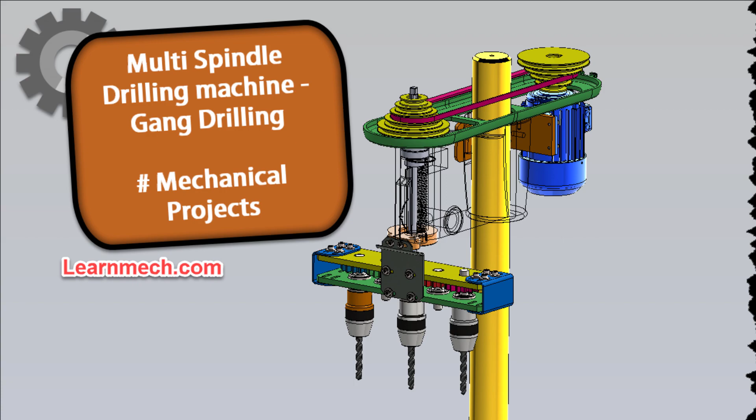In this video, we will see information about multi-spindle drilling machine, that is gang drilling machine. A multi-spindle drilling machine or gang drilling machine consists of several individual columns, drilling head and spindle mounted on a single base and utilizing a common table. Various number of spindles may be used, but 6 and 4 are common.

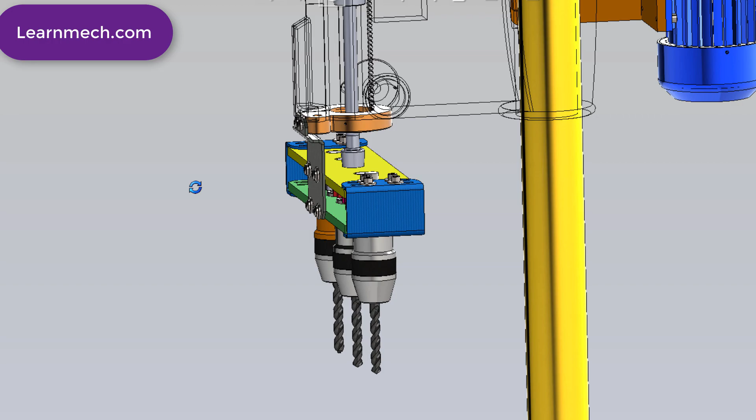For single spindle drilling machine and its parts, I have made already one video. You can check from here, or the link is given in description.

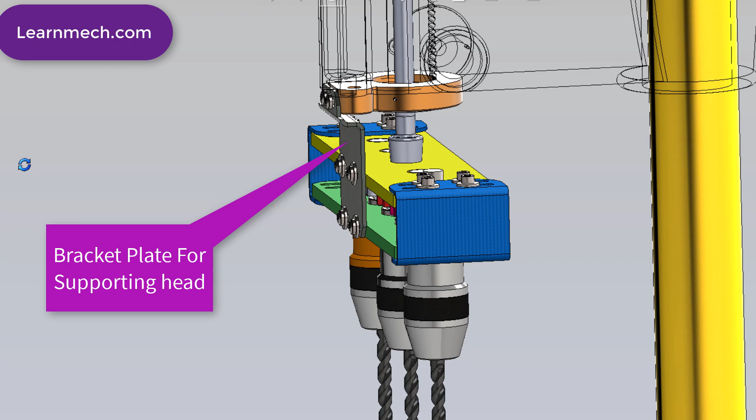This attachment is connected with main spindle using tapered collet press fit chuck. For making it more rigid, this bracket is used for extra support so that less vibration will occur.

As you can see here, this attachment consists of upper plate and lower plate made up of MS sheet and of 20 mm thickness.

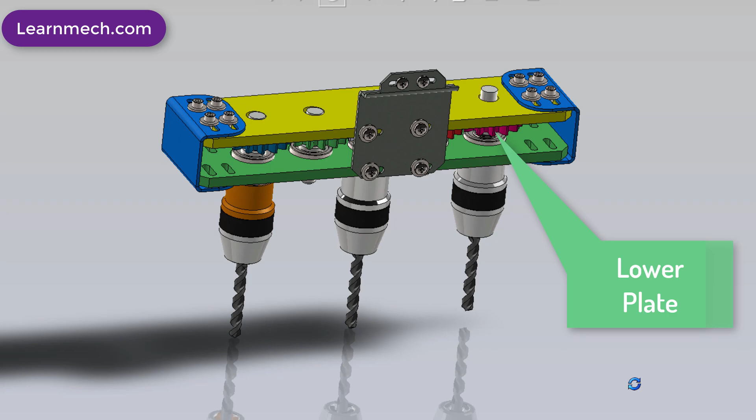Here we use spur gear arrangement between two plates to get rotation moment for each individual spindle axis.

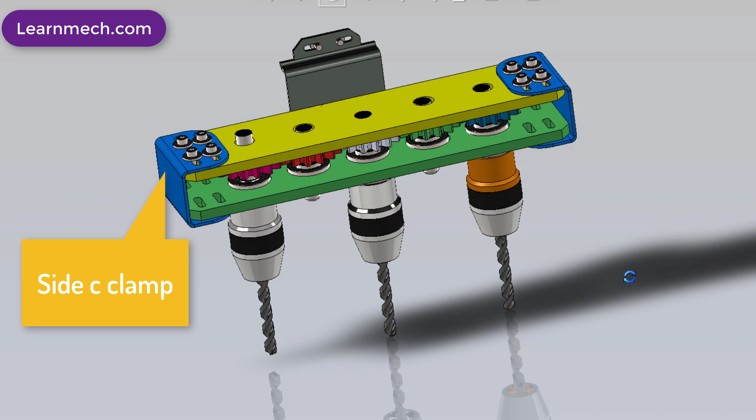These two upper and lower plates are held together using side C clamps. The side C clamps are bolted with each other.

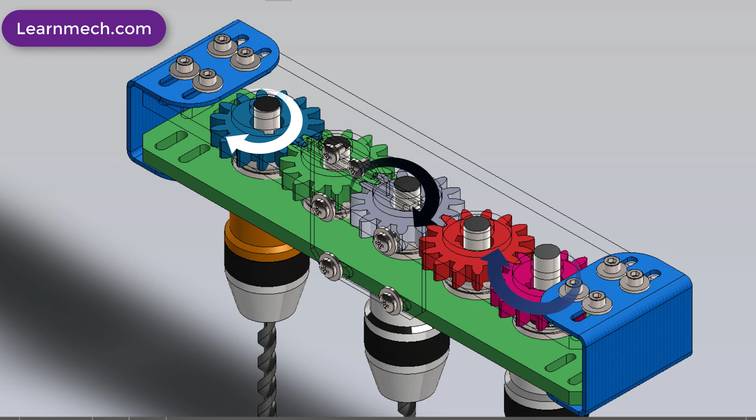These idle gears are used to change the direction of rotation, because all three spindle axes should rotate in the same direction. That is, in this case, it is rotating clockwise.

The ball bearings are used at each end of the shaft, and they are located within the upper and lower plate.

As the main spindle starts rotating, it rotates the whole assembly because all gears are engaged with each other.